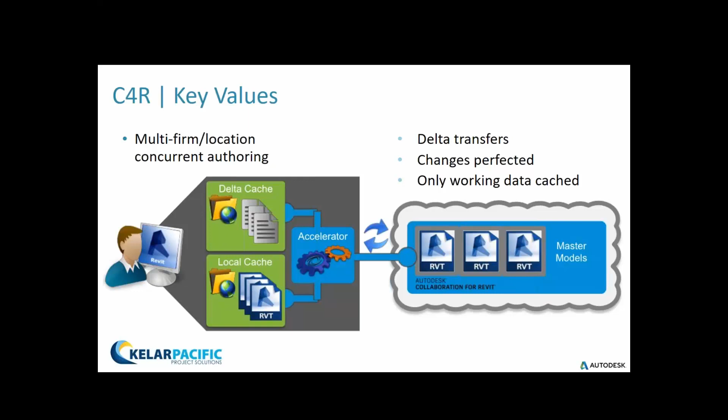They're not having it over the cloud or at the mercy of internet speed to do so. As a result, you don't even need a great connection to make this work. There's a lot of magic happening behind the scenes to make this happen.

The second value is it's also a zero IT setup solution, with an asterisk: you need to run the latest version of Revit, so somebody's got to install that, and install the Collaboration for Revit add-on, which starting in 2017 installs with Revit and updates by itself. Whoever manages your account as a contract manager has to go into the account portal and provision you for Collaboration for Revit. But nobody walks over to the server closet, ever. That's just not relevant, because the BIM 360 platform is taking the risk on keeping the model, and this is a big deal, especially for small to mid-size firms that typically wouldn't have that kind of IT expertise in-house.

The next key value is integrated communications. Collaboration for Revit comes with an integrated communicator chat tool. Communicator solves a problem that Revit didn't really address before.

What's going on inside the Revit project, directly within Revit. We had the work sharing monitor utility, and then Project Bluestreak for a while, but this allows us to directly communicate Revit user to Revit user.

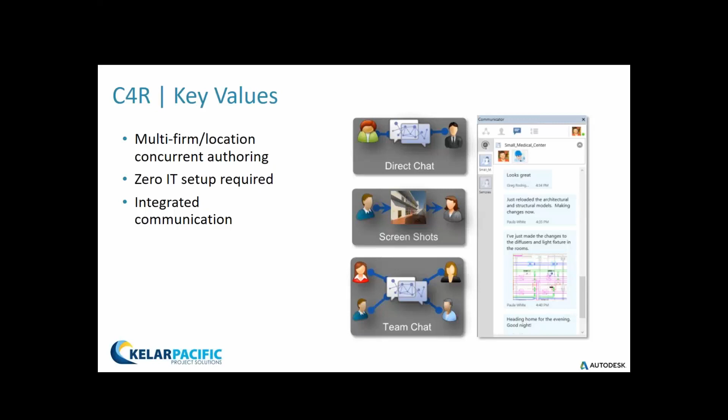Not email, not an external chat mechanism, but something that's actually aware of what's going on in the Revit experience. You can take a screenshot directly from the Revit model while in the communicator tool, upload attachments to share user to user, and it's a permanent record. It's something you can go back and see, to understand why certain design decisions were made at that time. That's a piece that comes with Collaboration for Revit.

There are a few other little things, but the bottom line is we've flipped this big switch that allows you to work on your Revit model in a connected experience, whether from home, the job site, the client's office, the coffee shop, or anywhere in the world. That's a significant set of functionalities we offer.

The thing is, Collaboration for Revit is not an island. It runs on top of BIM 360 Team, and I'll reinforce this more later. You'll have a lot of project participants who are BIM 360 Team users, not necessarily Collaboration for Revit users. Those could be consultants not using Revit at all, or not using Collaboration for Revit. It could be the civil engineer using Civil 3D or another solution. It could be a client you want involved in the communication process.

I really want to show you some things in BIM 360 Team that I think change the client relationship completely. So you have this group of people using BIM 360 Team, and Collaboration for Revit as a back-end mechanism, since as I said, it's running on top of BIM 360 Team.

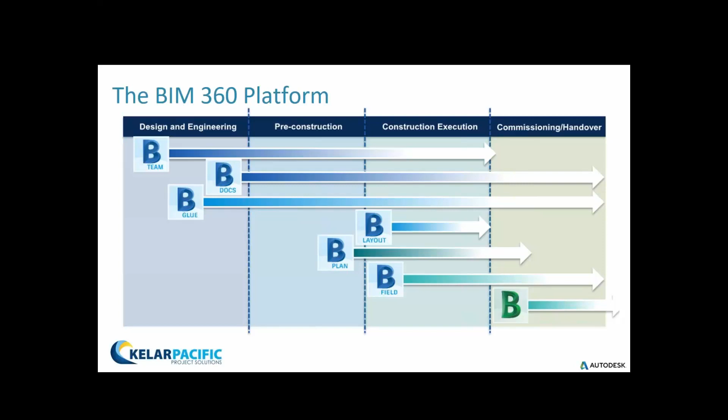As we came into this process, because really it's where we come while we're still figuring out things. You know, tools like Glue are great when we get to real coordination, when our models have some real substance. Docs is great when we're at a point where documentation is relevant, matters, and we need to kind of mark things up and track things among the documentation. But until that point, we need something where we're really actually figuring out what the design is.

That's where BIM 360 Team is really strong, and it's strong because it understands the project data. So long story short, we started out with A360 years ago. Most of you probably have touched that at some point. A360 was kind of the Facebook of file sharing with Autodesk, a cloud-born solution, but very basic in terms of, it's a file storage site that happened to have a better viewer than some of the generic file storage sites out there. A little bit of integration with some of the Autodesk applications like AutoCAD that evolved into A360 Drive, which we have today, and A360 Team came along.

A360 Team was the first time that we had a cloud-born project-centric solution, something that actually structured all the data around the project and participants around the project. That started to make sense in terms of what we need as AEC professionals, except that A360 Team didn't just serve AEC, it served all of our users. And Autodesk has a lot of folks, for example, in the manufacturing space. So the recent rebrand restructured A360 Team into BIM 360 Team and Fusion Team. Fusion Team is for the manufacturing side, and allows us to actually structure the product for the specific audience.

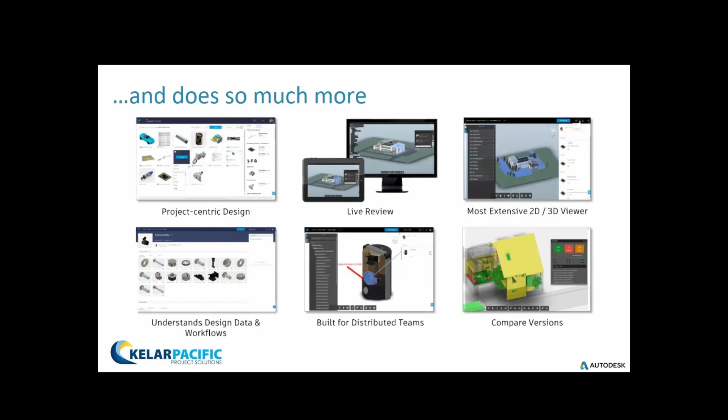As I mentioned before, there is a lot more to this than what I get with a basic cloud storage solution. And don't get me wrong, Box, Dropbox, Google Drive, and OneDrive, I use all of those things. They are all very good at the one thing that they do. But unless you're just looking at a Word document and wanting to edit a few things, they're not going to understand what a project is and how to structure a model and how to conduct reviews and track markups and comments and all of the things that we get here in BIM 360 Team. I want to reinforce the any format part. I mean, over 100 file formats, that's a large number.

Okay, there's a list you find on Autodesk Knowledge Network, but that's a lot of Autodesk formats, most of them in fact, and then a huge number of third-party file formats. And so it's great to just have a viewer that doesn't care. It doesn't require it to be a PDF or an IFC file or something like that. Just bring in the data and it'll be viewed, and in fact it's intelligent data that has deeper properties. Those are available to be seen in most cases too,

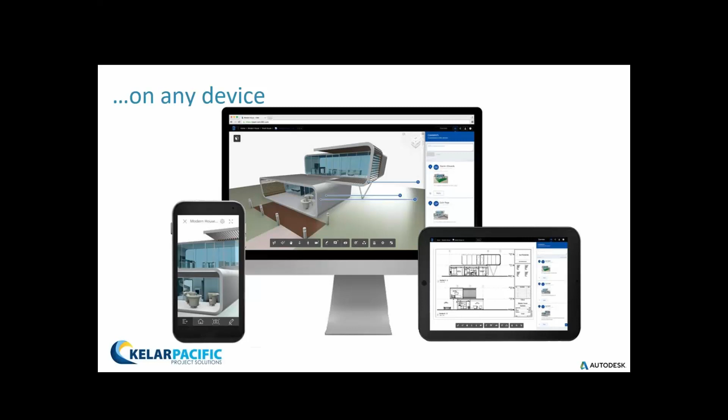and it happens to be on any device. I mean, think about for just a second how absurd the idea of spinning a 2 GB Revit model around in a browser or an iPad would have been just a few years ago, right? And now that's completely possible. So the large model viewer embedded into BIM 360 Team and other BIM 360 tools is very powerful and lets you have this at your fingertips.

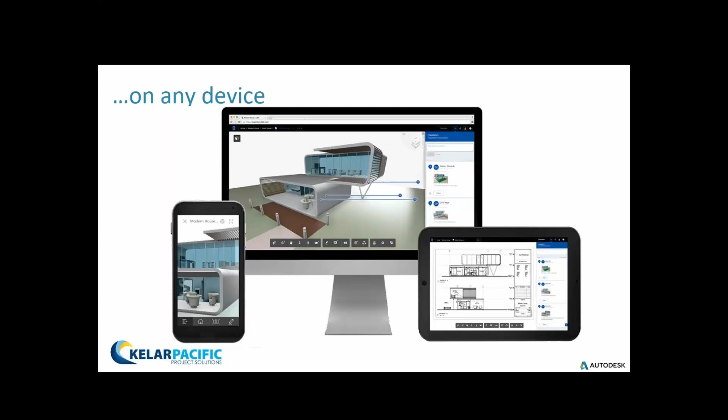So with that, I think I'm gonna jump into the Collaboration for Revit demo and then BIM 360 Team and just show some of these features, a little bit of a walkthrough of the interface, as well as a couple of more high-level features that are available to us today. Okay, so the Collaboration for Revit demo. All right.

Okay, so what we're gonna show over here today is a small medical center project. It consists of an architectural model, structural model, and mechanical model. So there are gonna be 3 Revit models on the cloud from 3 different disciplines. And then the team that we're gonna demo on this project is we have 3 people from the architects'

team. We have Hans. He's the principal architect. He's not a Revit user. He's always on the go, on the train, on a plane, and he doesn't need to open Revit to look at the model. And Greg and Paul are the architects working inside the office. Mindy is a structural engineer from another firm around another corner of the city, and Paula is the MEP engineer from another town or another location.

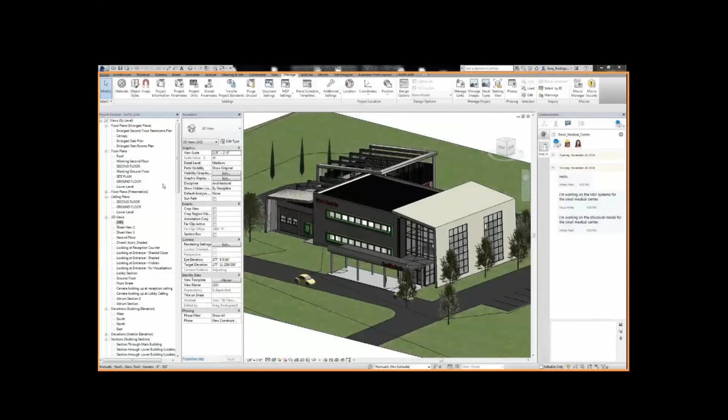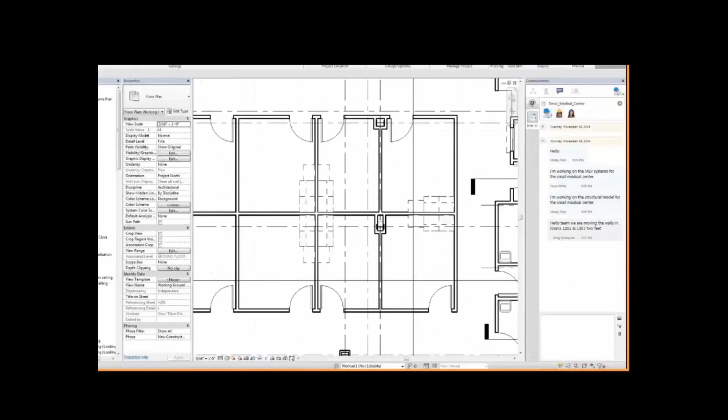So right now we're showing Greg's view, the first architect working on the model. So you see the chat communicator on the side. He needs to modify the walls to adjust the area of a couple of rooms. So he's using the chat communicator to send a note to the team that, hey, I'm working on this area. So then he's going to try to make the changes that he wants to do.

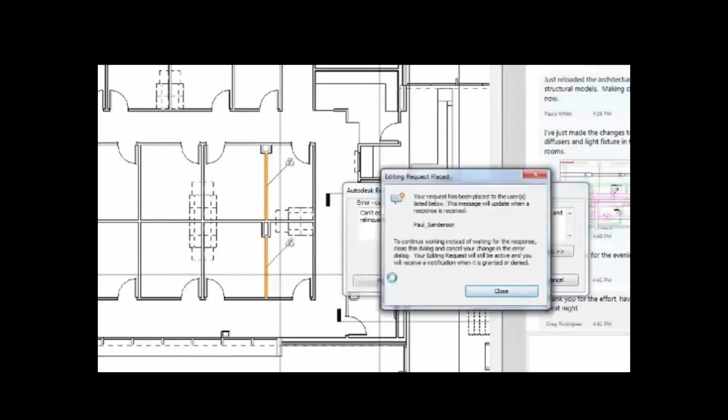All right, so as soon as he tries to move the walls, he receives an error message that those objects are under ownership of someone else, that happens to be Paul, his colleague. So he sends a request to Paul to grant him permission to make those changes. And he also sends a chat notification to him, hey, can you please grant permission. Now let's switch to Paul's side.

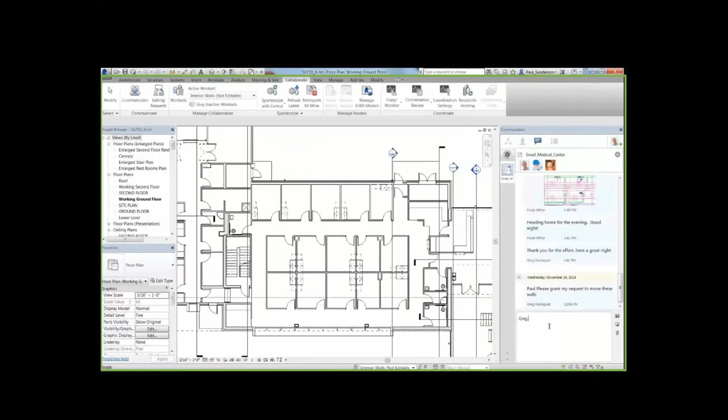So Paul actually sees Greg's chat message through the communicator, and he is going to check his requests, and then he sees Greg's request, and he grants the request to him. And he will send a note to him, hey, I granted your request. So let's get back to Greg. And he sees a notification that the editing request was granted in the Revit interface.

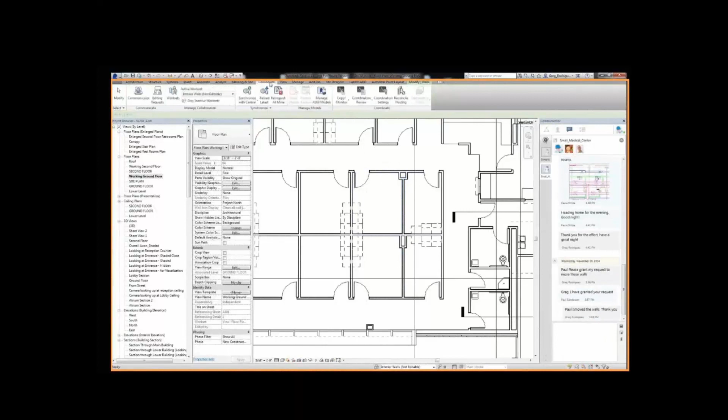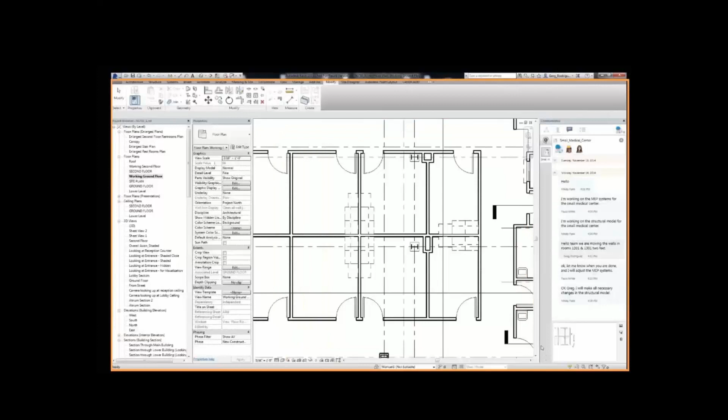So he goes ahead and changes the walls, commits the changes, and then he syncs the model to the central, and the central happens to be on the cloud. He puts a comment about what he changed, and he also takes a screenshot of the area that he changed to send in the chat communicator to the whole team so they know what's going on. All right, now let's switch to the structural engineer side.

So Mindy works in another firm, she has her own Revit structure model, but the architect model is linked into her model. And then she reviews the changes and lets Greg know that, hey, I'm going to see if I need to make any changes. And she's checking the project timeline and sees that the sync was completed.

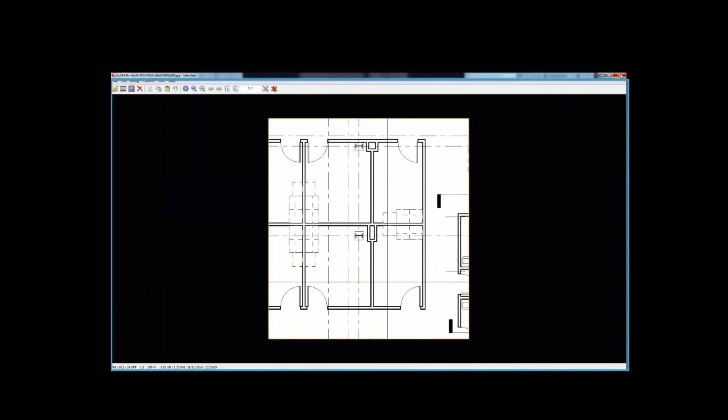So she's going ahead and reloading the architect model, which lives on the cloud, into her model. She also takes a look at the screenshot and sees, yeah, she needs to move some columns and beams to make the model coordinated with the architect's model.

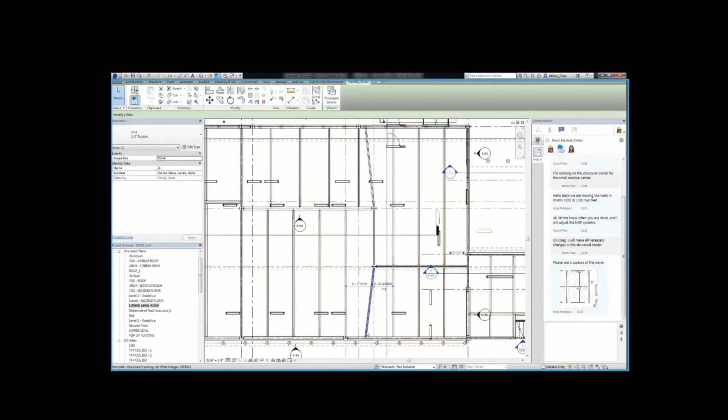So she's moving the grid line. Then she's going to have to adjust a couple of beams here and there, checking the model in the 3D view, making sure everything looks good. And then she's going to commit the change and sync her model to the central, and also put a comment about what she changed.

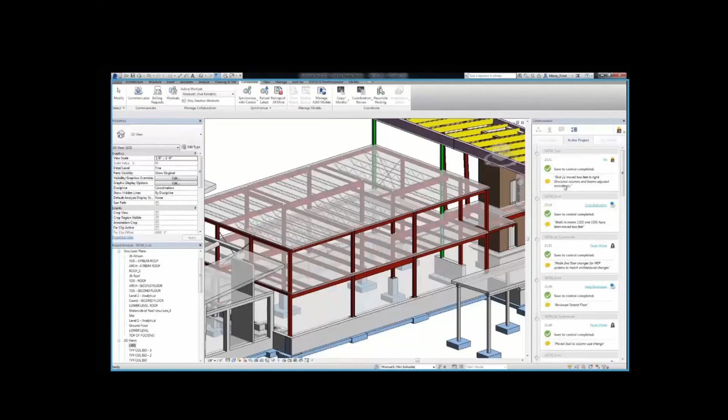And as you see in the project timeline, it's showing who synced at what time, and also shows the comments about what they did before syncing. Now let's see what's the effect on the MEP engineer, Paula.

So she also has her own model, but of course she has linked architect models to her model as a background. So she's communicating with the team: let me know when you're done so I can do my changes. And then she's letting the architect know that she's going to make changes after the sync.

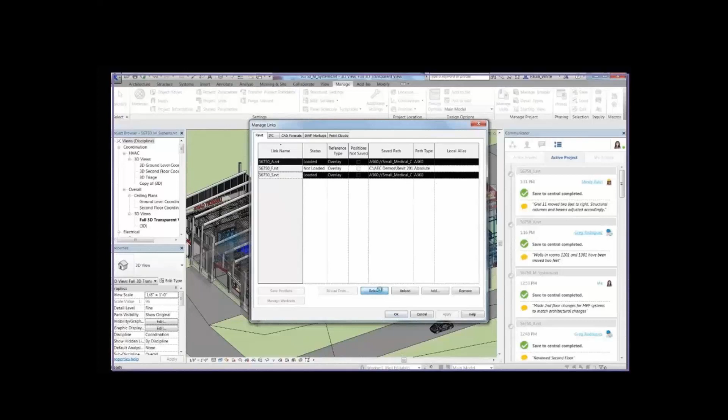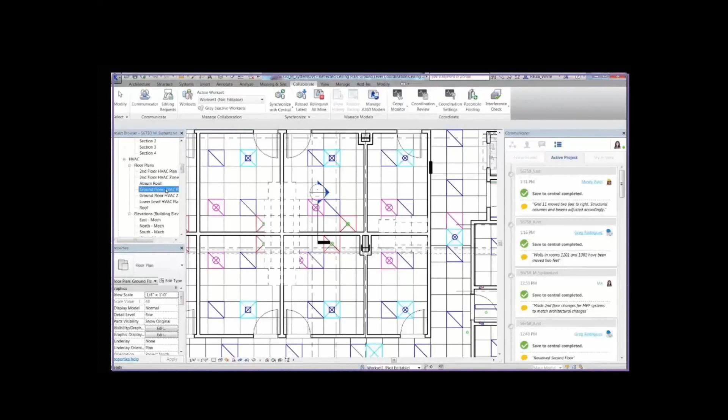So she's opening the links and reloading both the architect and the structural engineer links into her model, so she sees the latest changes. She's checking the model. She probably needs to modify a few objects to accommodate the new room size, and she will also check to see if any MEP duct systems need to be relocated or changed.

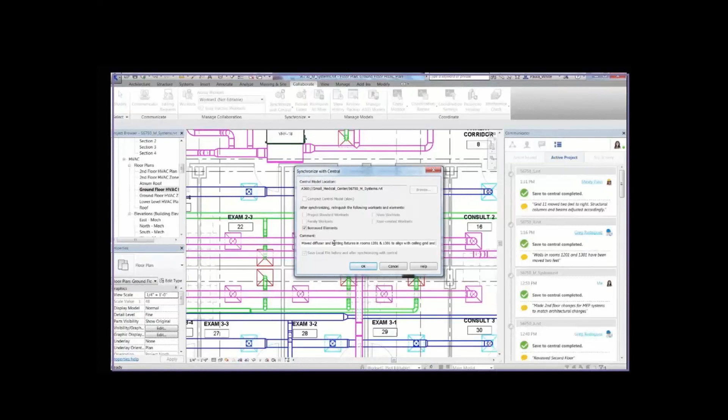And then once the changes are made, she's going to sync the model to the central cloud model and put a comment about the changes that she did. She will also send a note to the team so everyone knows what happened.

All right, now we're switching to the tablet view, which is used by Hans, the principal architect. If he needs to look at the model, why should he open a large model and open Revit? He can just install the BIM 360 Team app on his tablet and see all the projects or files available on BIM 360 Team, including this project.

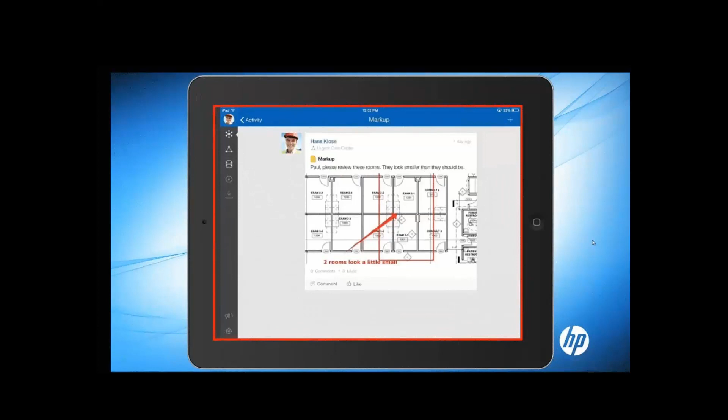And this allows him to look at the model and collaborate on the model if he has any comments or markup, even when he's not in the office, from anywhere. So this was the original markup he made on that room, that these rooms are small, and he sent it to his architects to do that change in the Revit model.

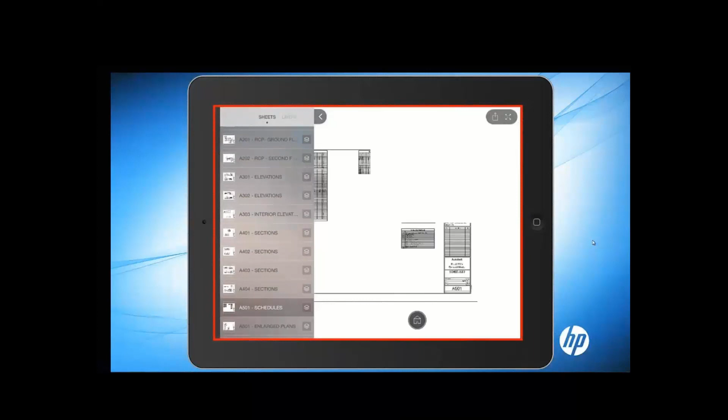So he can see a very light 3D view of that model without having to open Revit, and he can see all the sheets available in that Revit model, elevations, sections, different types of sheets, even the schedule. So you can choose to publish what kind of sheets you want to show up on the BIM 360 Team site.

So with that, I'm going to jump into BIM 360 Team and show you an overview of some of the features. Let me switch to my Chrome browser. All right, so right now I've logged into my BIM 360 Team. When you sign up for BIM 360 Team, you get a company hub, your own URL. And this is the main interface. You see a list of all your projects.

There are different filters: the projects that I'm part of, owned by me, or the projects that are shared with me because people from other hubs or other BIM 360 Team sites could invite me. And the projects that I actively work on, I mark as pinned projects. I also see a brief activity of my team, what was uploaded, what activities were done, and the comments, which we're going to cover quickly.

Also, if I click on my thumbnail on the top right corner, I could be part of different hubs. The Kelar Pacific hub happens to be my main hub, but for example, I was invited from Autodesk to another hub to collaborate on another project. So I could be invited to other companies' or firms' hubs as well. Now let's jump into this project and see what's inside.

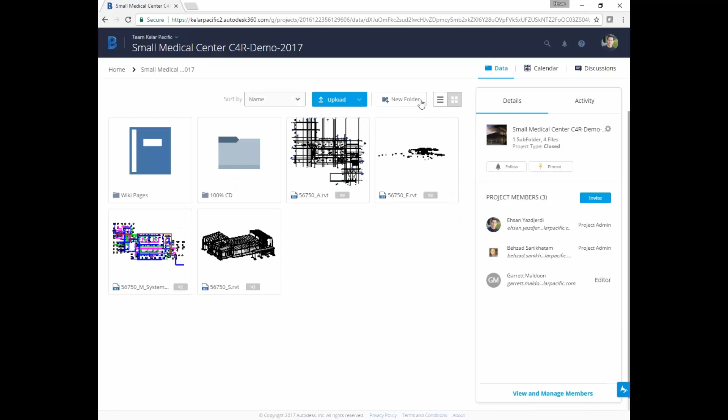So the interface is very simple to learn. It's not very complicated. Basically, here's my file structure, and I can create folders. I can upload files or folders. I can switch my view to thumbnail or list view, and at the right side I can see my project members, or my project activities as well.

And then we have of course the project calendar and discussions specific to that project, which allow participation of multiple people. And then we have wiki pages, which are like a website of the project. Wiki pages allow you to do a lot of formatting, as you can do in Microsoft Word, for example, or on a website.

So it's like an internal website related to that project. As an example, I just put this knowledge article from Autodesk on how to get models into collaboration for Revit, and I did a bunch of formatting and highlighting to show the capabilities of that. And this model can be worked on and commented on by multiple team members to complete the wiki page.

Let me go back to my project. As you see, the navigation back and forth is very easy. And if you look here, you also see the version numbers. What that means is that it's version control. BIM 360 Team keeps the history of the versions of the same file that are uploaded. And if you look here, it's going to truncate, but it says cloud Revit model. That means these Revit models are created from within Revit into BIM 360 Team. That means that's my central model.

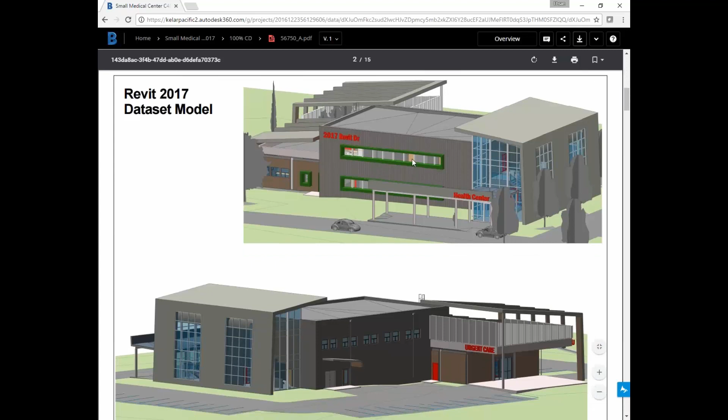And of course, you can upload any different type of files over here. As I said, it supports a lot of file formats. For example, I uploaded a PDF in a spec folder, and that's again version control, and I can view that as well. And then I can go back. So I don't need to install any software. BIM 360 Team is browser based, and it's very powerful.

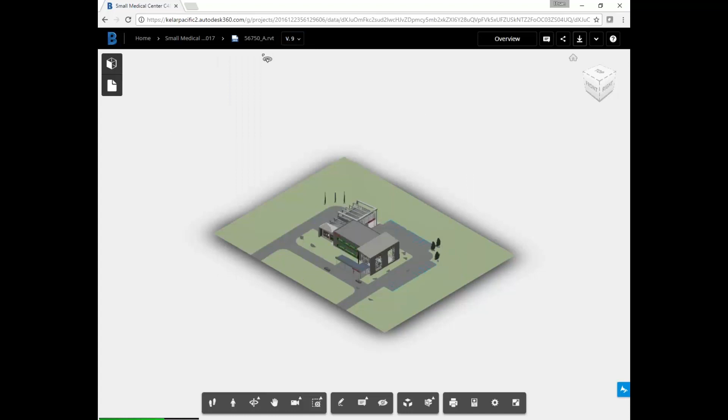So let me browse into one of those Revit files to see what we have over here. As you see at the top, it's a hierarchy of the project, and then I can see the versions over here, all the versions that were uploaded, the time, and the person who published the model. And then at the left I can see my views and my sheets. This is a 3D view, and I can even filter stuff based on the categories. And then I can see all the Revit sheets as well.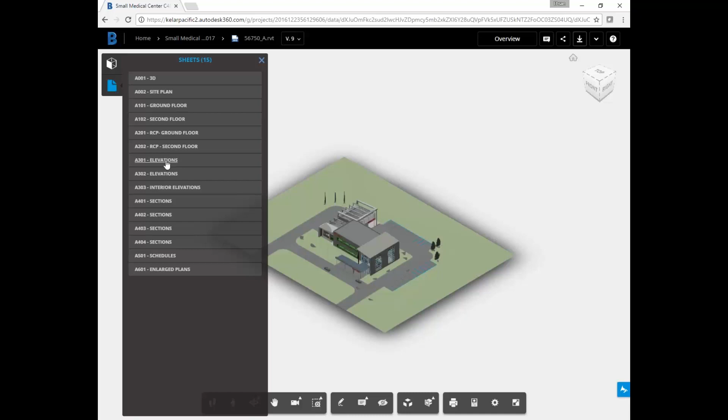So there's no need to keep printing to PDF when you have hundreds of files in your Revit file, and that takes a lot of time when you have, let's say, 100 files and you want to print them to PDF. It keeps your machine busy for a while. And then I can browse into any of these sheets available to me, sections.

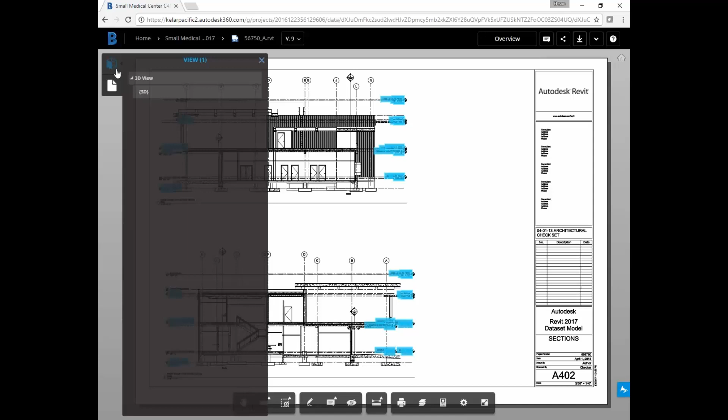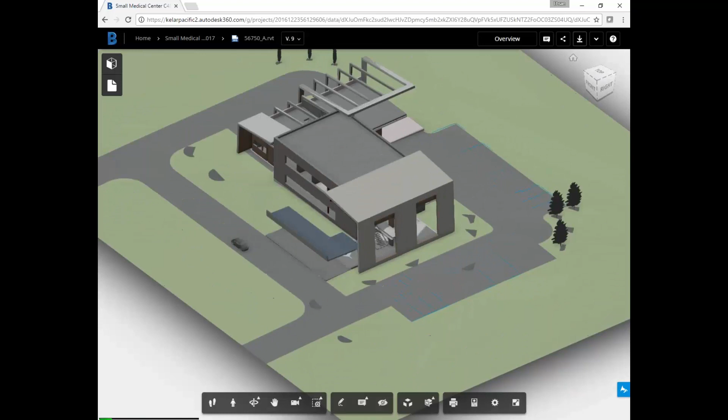And then I have some tools over here. I have the measuring tool. I have the markup tool. I'm going to show in a little bit how markup works, and let me go back to the 3D view to show some of the features there as well. I have all sorts of navigation tools that are standard in other applications, like the popular ViewCube, which I can use to navigate around my model. And the navigation is standard from within Revit, like with the mouse wheel and the Shift key I can orbit.

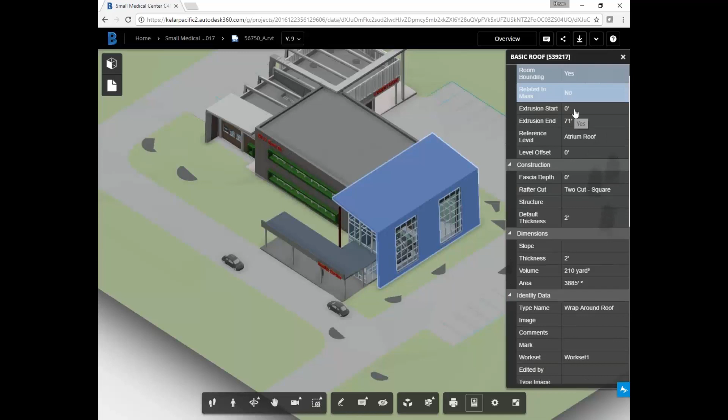And then I can select any of these objects, click on properties, and it brings in all the Revit properties, so it understands your project data. And in fact I can create a markup or a comment on an object or on a point. So I'm going to create a comment on that object, "check size," just something to show you.

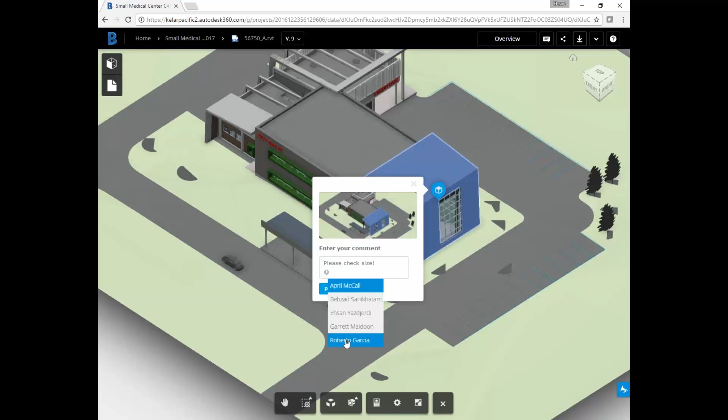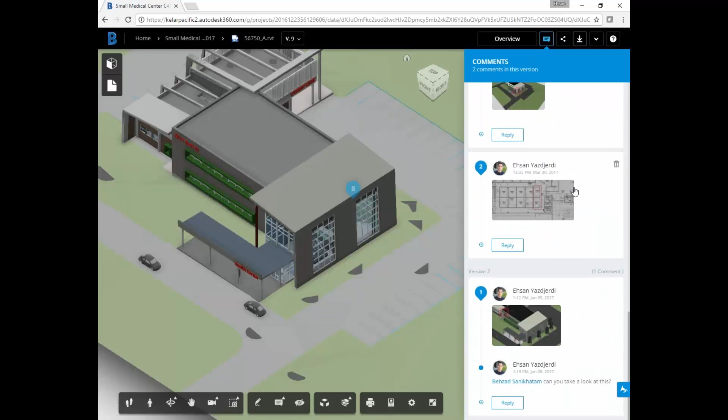And I can also use @mentions to direct my comment to people who are on my project. For example, I can select my colleague Garrett and post this comment, and it's going to stay there. He's going to get an instant email notification with a link to this location of the model. And at the side I see the history of all the comments and markups, and their version control. For example, I made some comments on version 2, and Garrett can click reply and reply right to my comments, and I will get a notification that Garrett replied. So that's a really powerful communication tool.

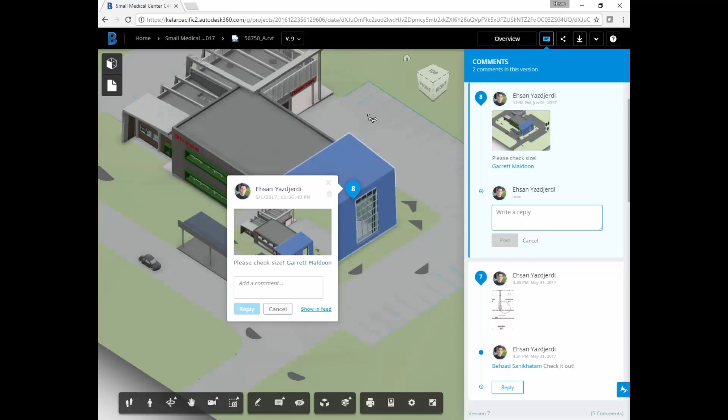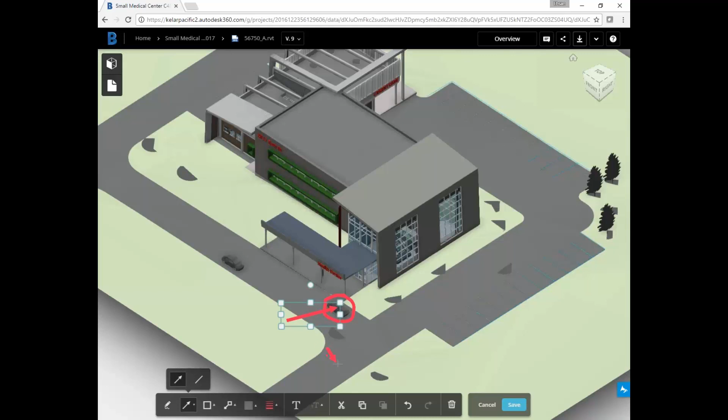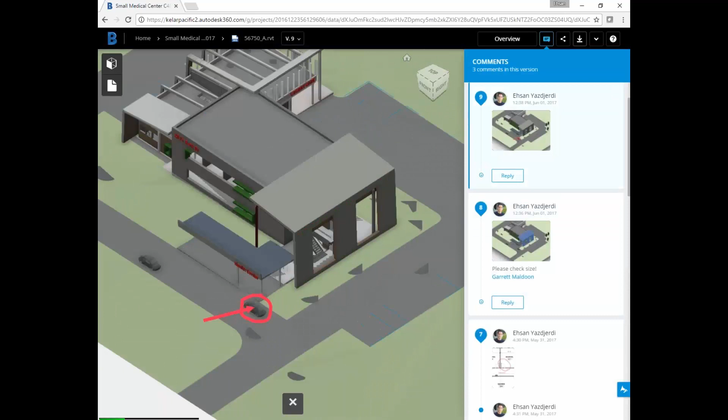It could be object by object, and of course we have markup tools as well. If I click on a markup, I can draw, I can put text, I can do all sorts of arrows and stuff. And then I can save. And if I happen to go somewhere else, orbit around the model, and then want to go back there, I can just click on that. It will bring back the view in which I made that comment.

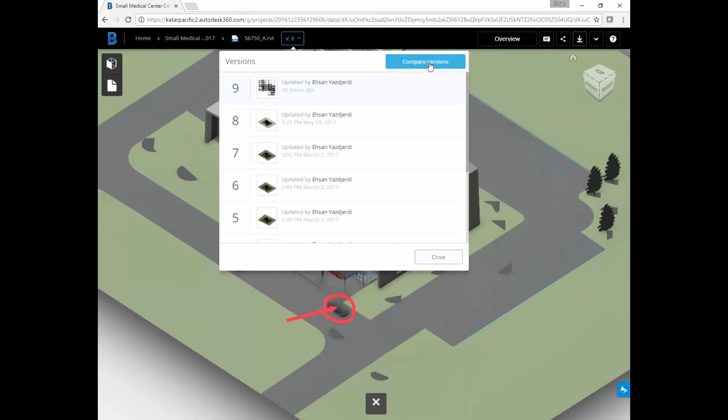So there's of course a version comparison tool over here, which I can select. For example, I want to compare version 9 to version 5. It's very powerful. It shows you all the changes, the objects that were added, the objects that were modified, or even the objects that were removed from the model, and it gives you a list of all those objects in a color-coded fashion.

Also, I have the share button over here. I can choose to directly send a public link of my model. Also, I can allow or disable their download. So basically, I can disable their download if I don't want them to download my model yet. They can just view that on a viewer and mark up on that.

And I could even, for more security, set a password on that link and send them the password separately. And then I can also email directly from here, or I can embed that link in my website if I need to have an online portfolio of one of my projects.

And also another powerful tool is live reviews. Live review is, as I mentioned before, like a live session where multiple people can orbit around the model, but it's all rendered in the browser on the BIM 360 Team servers. So it's not as sluggish as you might have experienced in other meeting applications.

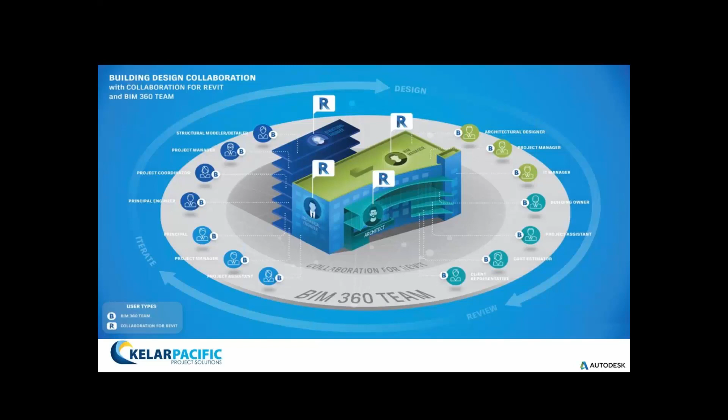Even if you're not a Revit user and you're just interested in being able to do a better job setting up projects and communication with others on your projects, or even if it's 3D AutoCAD files or even 2D flat files, to some degree BIM 360 Team may still be a good idea for you, because that is a platform.